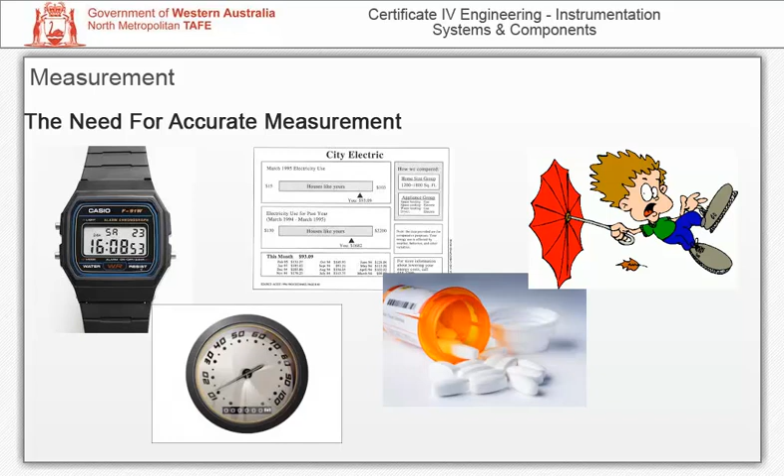Every day, we make and use all kinds of measurements, from looking at our watch to reading the speedometer in our car. The figures on our utility bills, the amount of active ingredient in our medicine, and the wind speed in the weather forecast are all outputs of measuring systems.

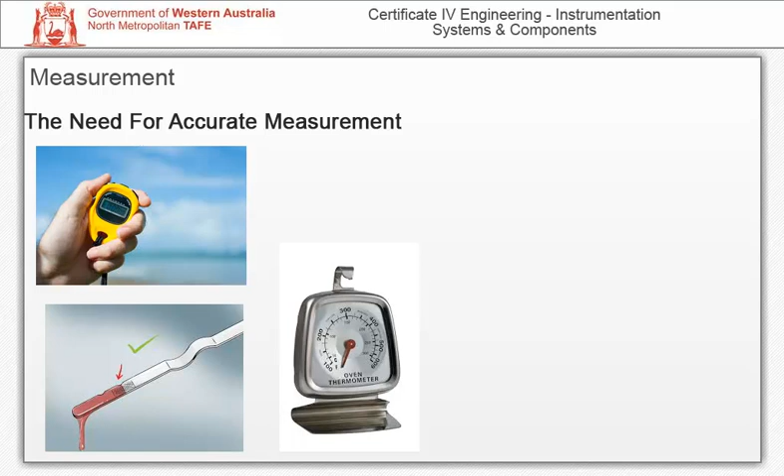Some everyday measurements are very accurate and some aren't. Even the cheapest digital watches are accurate to a few seconds a year, while a domestic oven thermometer can be wrong by several degrees. The situation has evolved because the accuracy you need to not miss an appointment is not the same as it is to bake a cake. As we will see, making measurements that are only as accurate as needed is important for many applications.

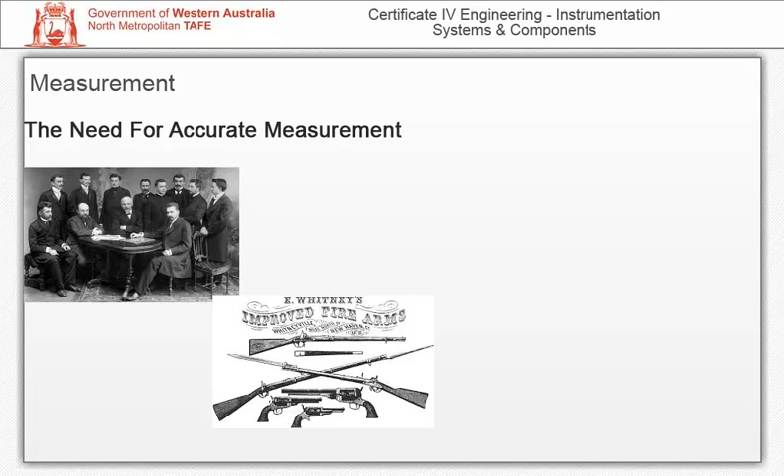The need for the establishment of scientific standards and the production of interchangeable parts in manufacturing has historically driven the need for ever more accurate measurements.

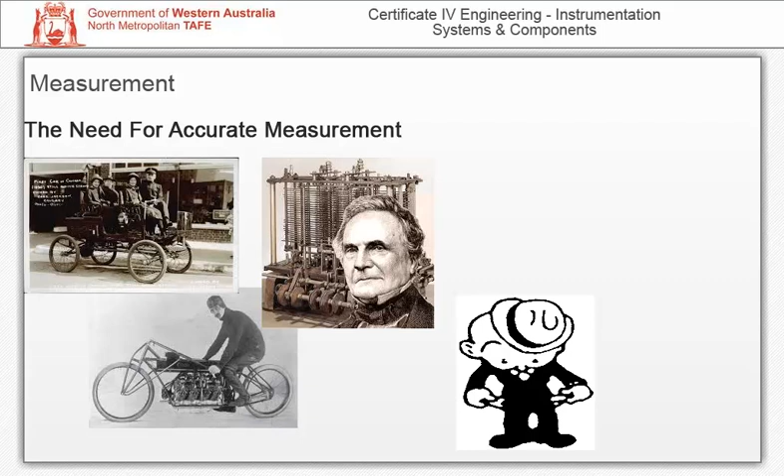When cars and other machines were first built, exact measurements didn't matter. Each part was custom made to fit with the parts that were already there. This led to cars and other machines being incredibly expensive to build and maintain, which led Henry Ford and others to develop mass production of standardized parts.

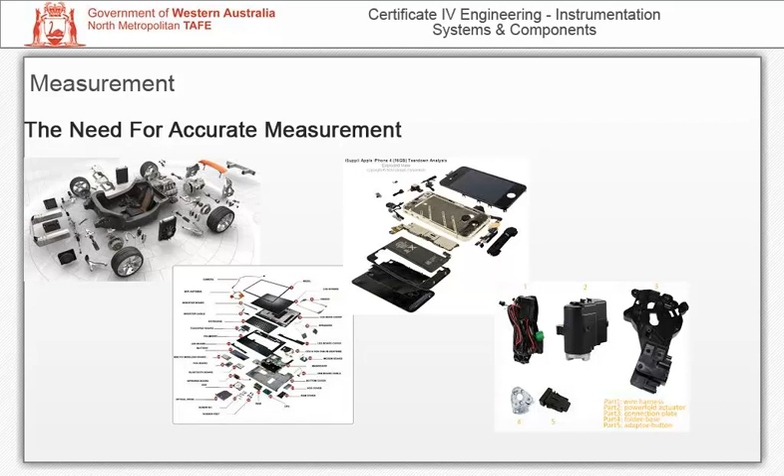Today, more than 80% of components used by any manufacturer are made by other companies all over the world. Every manufacturer needs to tell its subcontractors the range of acceptable values of dimensions, electrical characteristics, and other parameters of all these components. Otherwise, the devices won't work or fit together. Accurate measurements ensure that standards can be used to make technology run as smooth as possible.

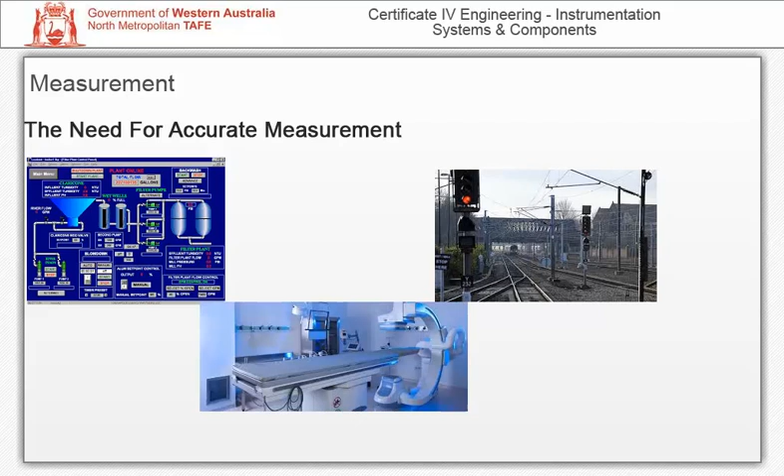We expect our appliances to work when we plug them into any outlet, our smart cards to swipe any reader, and our devices to connect with any open Wi-Fi network. Standards organizations such as ISO and IEEE maintain these standards to enable the easier development of technologies and greater choice for customers.

The science of measurement is known as metrology and can be divided into scientific, industrial, and legal metrology. Scientific metrology aims to develop and provide international measurement standards. Industrial metrology is the application of measurement science to industrial processes, and legal metrology underpins fair trade and consumer protection.

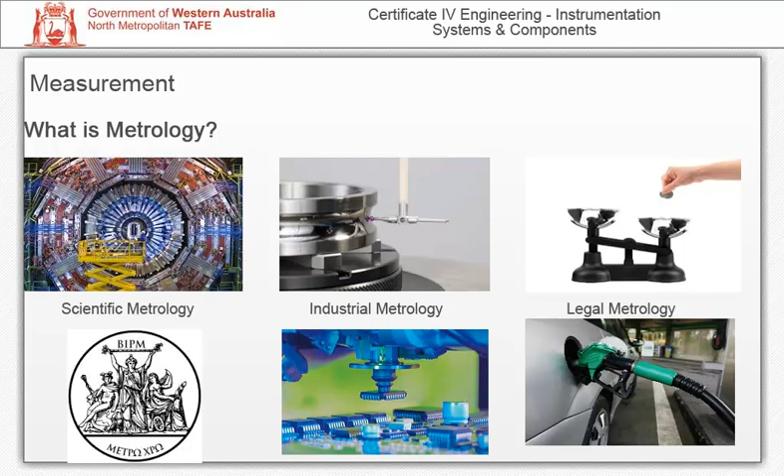To make any kind of measurement, you'll need to use a reference, such as measuring a piece of wood with a tape measure. Without any reference, no measurement can occur. If you found that one of your shoelaces is longer than the other by comparing them side by side, that is not a measurement. If you use a ruler to find out the difference in length, this is a measurement.

If you want to compare the measurement with someone else's, you will find it a lot easier if you can agree on using the same units. In the past, units were defined by a country's ruler, which gave us imperial units.

In order to establish and maintain an international standard, internationally agreed references have been produced, most notably the SI system of units. These references are kept by the International Bureau of Weights and Measures in Paris, but these references are not static. For example, the international standard for the kilogram is a bar of metal, kept in a vacuum at a fixed temperature. Despite the care in which it is maintained, it is constantly changing.

Atoms are constantly falling off, getting stuck to it, or disintegrating inside it because atomic decay occurs in every material. The corresponding changes in mass are tiny, a few micrograms per century, but this means that the kilogram bar cannot do its job indefinitely.

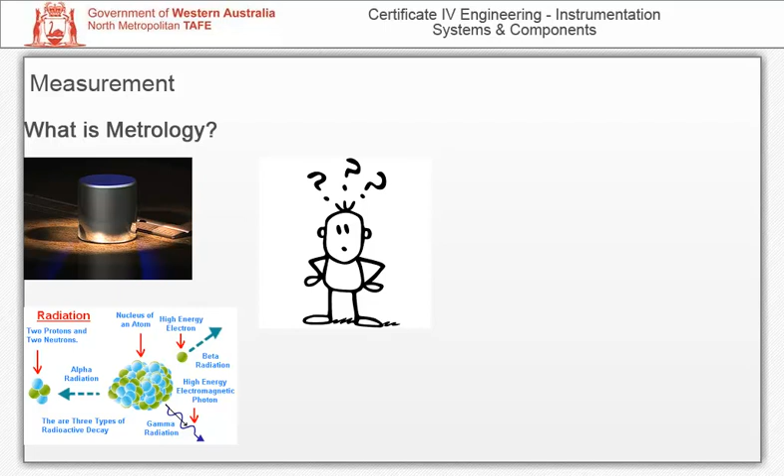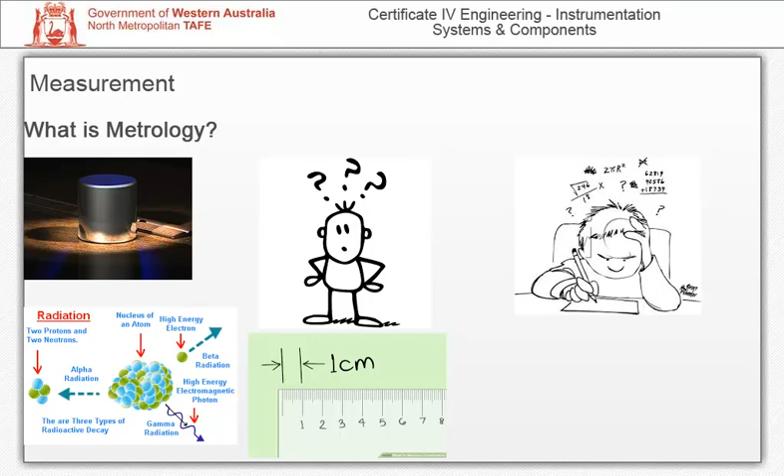If we only need the measurement to be to the nearest centimetre, we can say that measurement is not to get the right answer, but to decide on the uncertainty that can be tolerated. One problem is defining exactly what these measurement terms mean, and another is that some measurements only make sense when several measurements of the same thing are made.

That's because making a good measurement is much like trying to hit a target. The chances of getting a satisfactory result is greatly increased if you make several attempts.

A good measurement result is achievable by using, first, the right measurements: the role of the measurement is known in the process, and its use is clearly defined and understood, to identify potential problems and improvements. Second, the right tools: the measuring instruments need to be in a good state of repair and calibrated. They also need to be used according to the manufacturer's recommendations.

3. The right people. Whoever makes the measurement needs to have received the right instructions and training. 4. Regular review. Measuring instruments are easily damaged and their performance changes over time, so regular checks are required. A planned written schedule of checks is beneficial to avoid delays.

5. Consistency. Local factors need to be taken into account, particularly with highly accurate measurements. Gravitational forces and temperature are variables that can alter a measurement. Multiple measurements may need to be taken in order to make corrections or carry out further investigations.

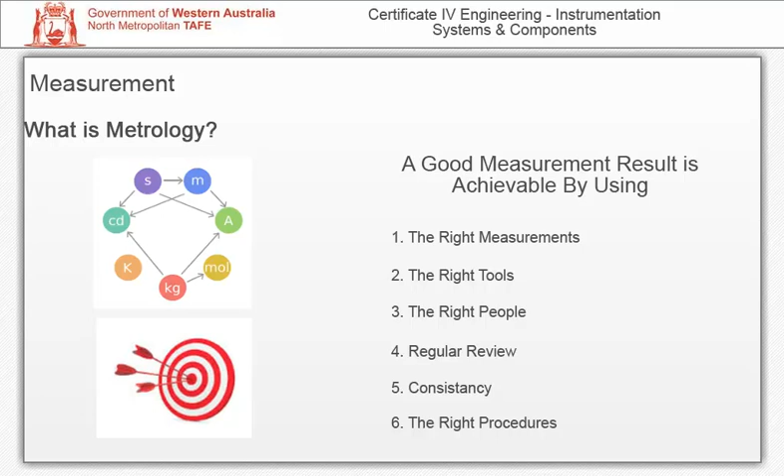6. The right procedures. Measurements should be carried out according to written procedures, which may include health and safety issues. A risk assessment may also be part of the procedure for measurement.

Here are a few terms used in measurement and what they mean. Confidence level and uncertainty. If you make a number of measurements of something, you are most likely to get a range of answers. If you find that the concentration of carbon monoxide gas in your area lies between 9 and 11 parts per million, but you couldn't be 100% sure that it is, you could express your confidence through statistical analysis that you are 95% confident that it lies between those values.

Uncertainty is the doubt that exists about the result of any measurement. Since there is always a margin of doubt about any measurement, we need to know the size of the margin and the size of the doubt to know the uncertainty.

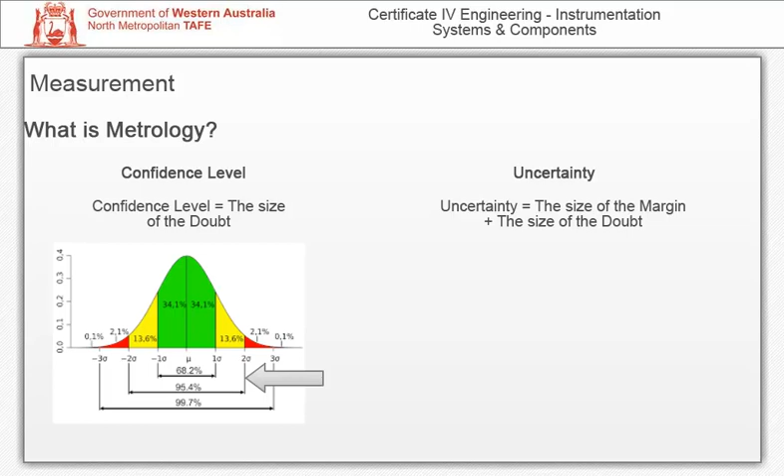We might say that the length of a pipe measures 10 centimetres plus or minus 1 centimetre at the 95% confidence level. This result could be written 10 centimetres plus or minus 1 centimetre at a level of confidence of 95%. This says that we are 95% sure that the pipe is between 9 centimetres and 11 centimetres long.

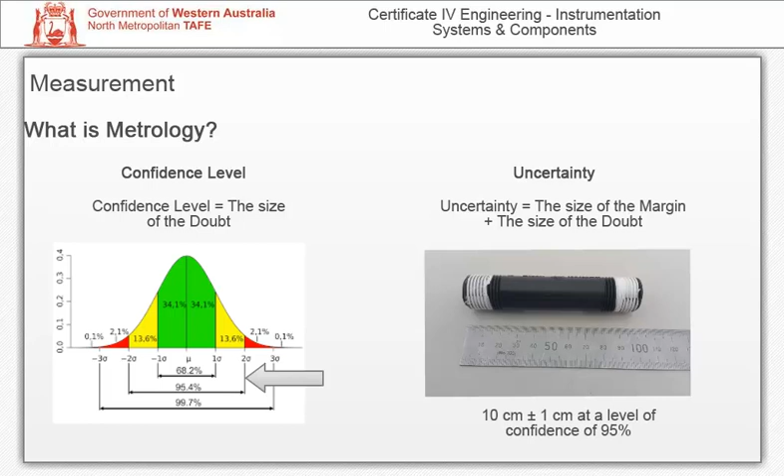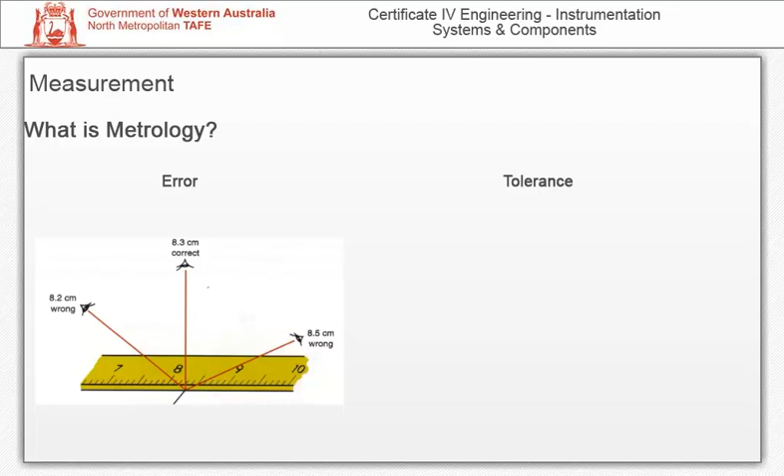Error simply refers to the difference between the measured value and the true one. A tolerance is the maximum acceptable difference between the actual value and the value specified for it. For example, if a 10 ohm resistor has a tolerance of plus or minus 10%, the minimum acceptable resistance would be 9 ohms and the maximum would be 11 ohms.

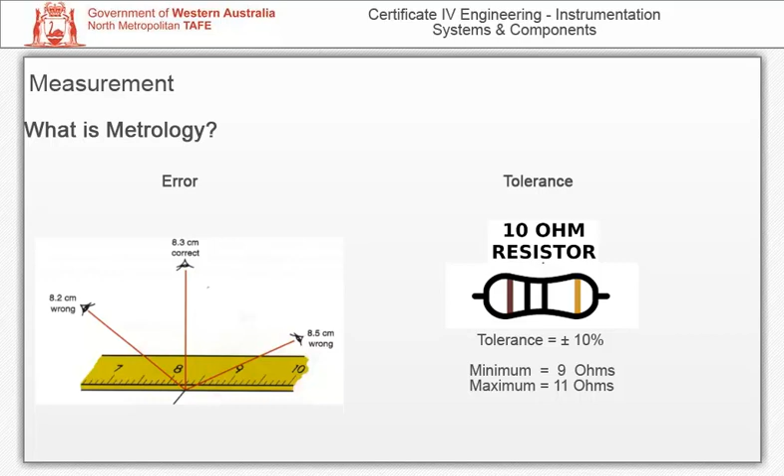Precision and accuracy. If you make several measurements and find they also agree closely with each other, then they are precise. If they agree closely with the actual value, then they are accurate.

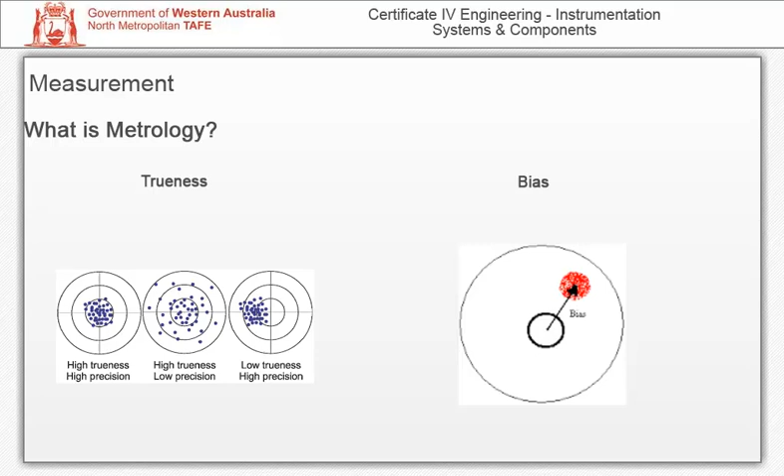Repeatability and hysteresis. Repeatability is the measurement indicated by an instrument under the same conditions, using the same equipment in the same way. Repeatability does not guarantee accuracy.

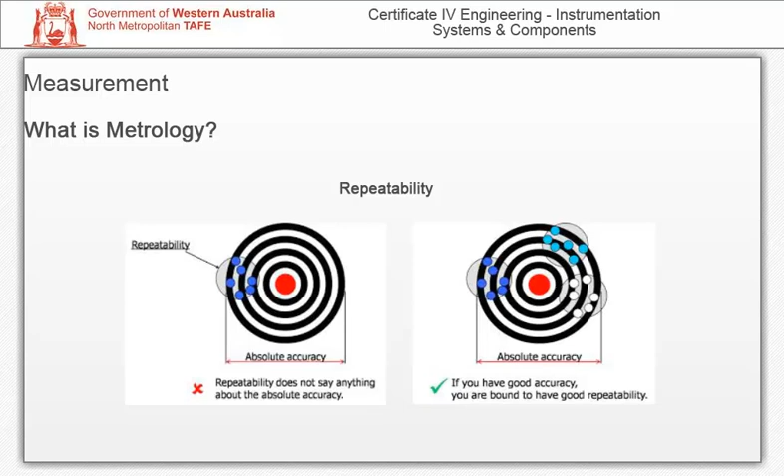Hysteresis is the amount of difference between the measurement of the same variable approached from different directions, i.e. a rising and a falling output. Excessive hysteresis will result in linearization error. An instrument's datasheet will specify the repeatability and hysteresis of an instrument as a percentage of the span.

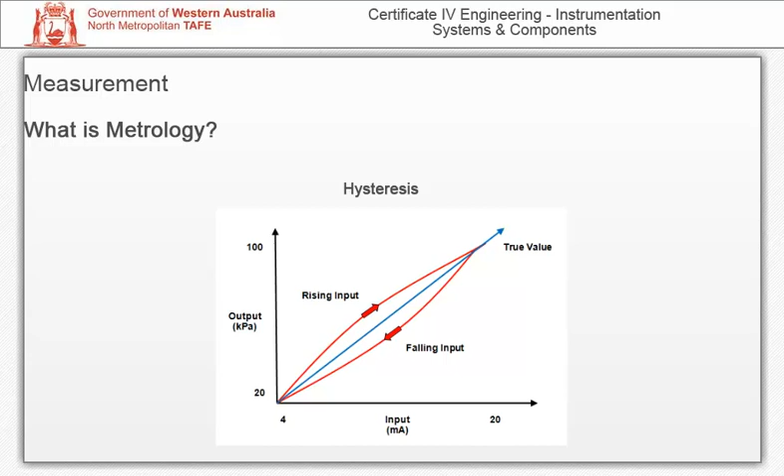Traceability. All measurements need to be traceable through an unbroken chain of comparisons. Traceability is ensured by routinely calibrating to a higher level reference standard. Typically, we use a reference standard to calibrate our process instruments. These references are then sent periodically to a standards lab, which has more accurate instruments.

The standards from the calibration lab are periodically checked against higher level standards, such as the national standards, which in Australia are maintained by the National Association of Testing Authorities. The national standards are ultimately referenced against the international standards.

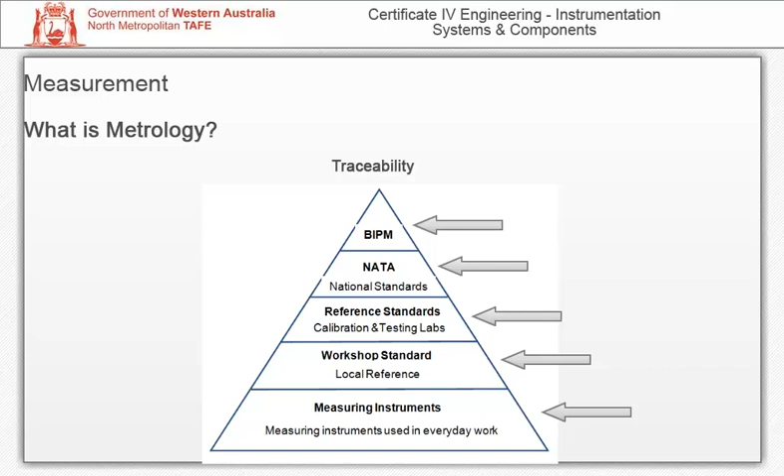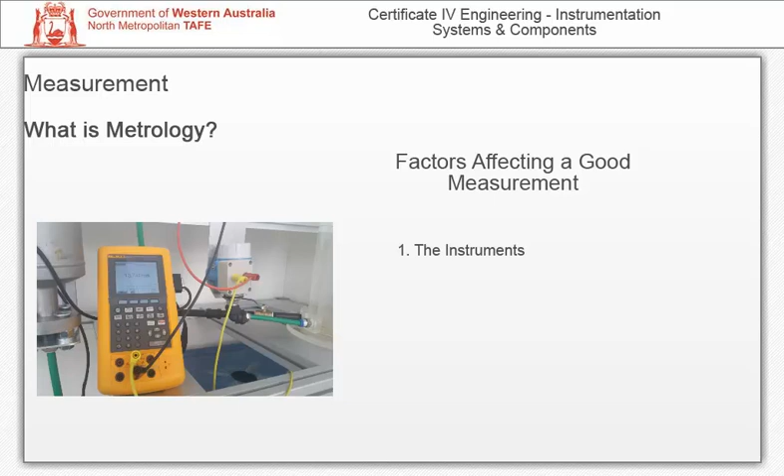Factors affecting measurement. 1. The instruments. Electrical measuring instruments can be affected by electrical noise, either as background EMI or as a voltage disturbance. Proper earthing of equipment is also important, which can be tricky when several electrical instruments are involved in the same measurement. Common earths need to be set up and checked to avoid earth loops.

2. The variable. The measured variable may be a moving target, but the changes may be small enough to be disregarded. It may be the case that the variation itself is being measured.

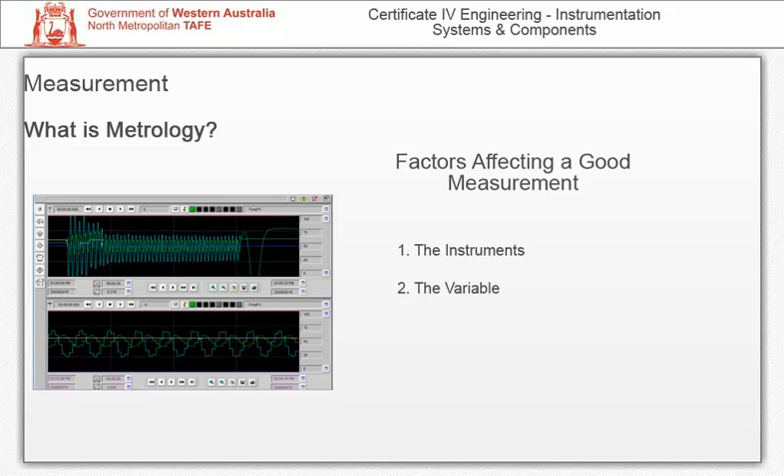3. Sampling, etc. The number of samples needed to reflect the reality of the process on the ground. If the measurements are not made in sufficient numbers at the appropriate positions and times, they will not be representative.

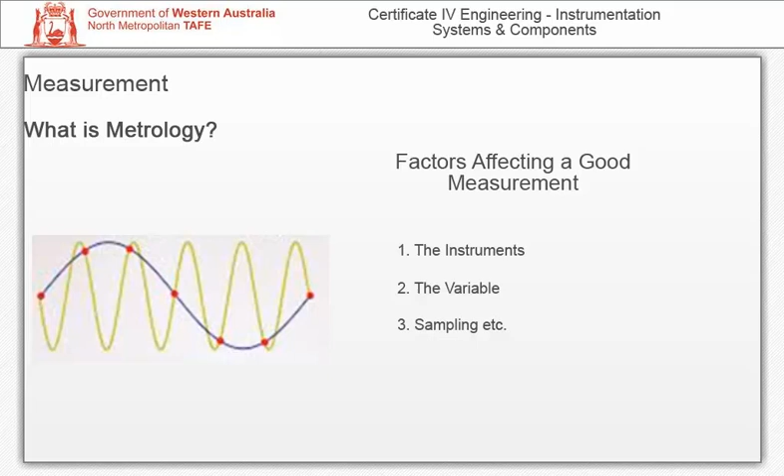4. Operator skill. What is a possible level of accuracy for one person may not be achievable for another. As skills and experience vary, often setting up the measurement is more challenging than the measurement itself.

5. Environmental factors. Vibration, temperature, air pressure, and humidity can affect all types of measurements. Measuring a variable like gas analysis can result in samples being contaminated on the way to and in the lab, whereas inline testing will give a different result.